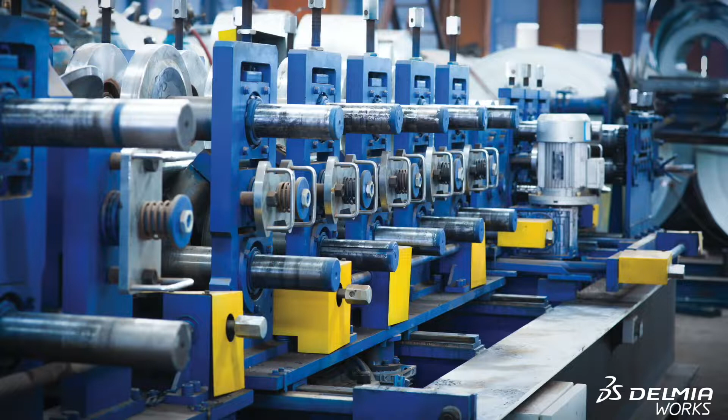Welcome to an overview discussion and demonstration of the manufacturing execution system from DELMIAworks. DELMIAworks understands your money is made on the shop floor, and the difference between an efficiently run facility and one that isn't can be drastic. Not only is it a function of time and money, but also overall customer satisfaction with on-time delivery of quality products.

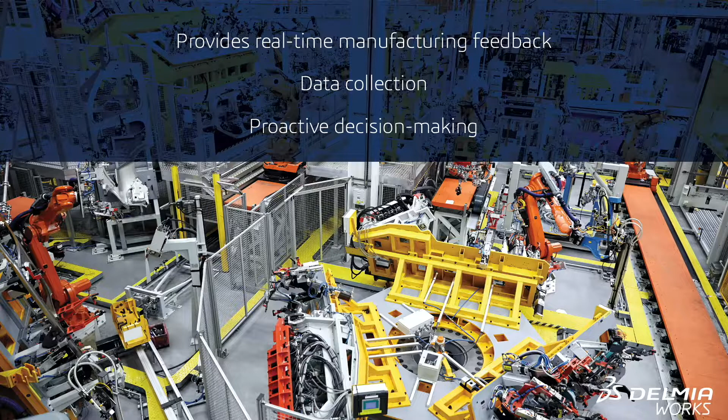DELMIAworks has developed a manufacturing execution system that provides real-time feedback of what is happening in the plant at each work center. These tools are designed to collect the data and feedback for users, which allows them to make proactive decisions that affect the organization.

Real-time machine monitoring from DELMIAworks is available in two versions: real-time production monitoring and real-time process monitoring. DELMIAworks provides a real-time production monitoring screen that allows users to drill into the details of the presented information. For example, from this screen, users can see things like what's running on the work center, parts to go and hours to go.

Standard cycle time information, last cycle, and average cycle. Users can also view quality issues that are outstanding for this item, hours to go or parts to go for in-process inspection, and other types of information.

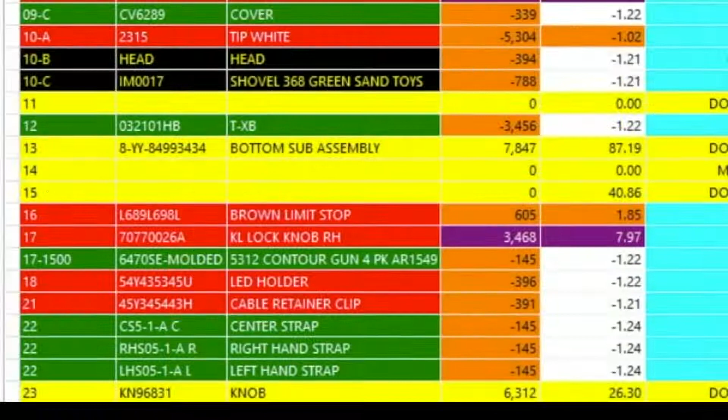Color coding is used here, indicating to users how well a machine is running for the given part that is being run. For example, machine number 1 is producing a volume cup. You'll notice that most of the line is colored in black.

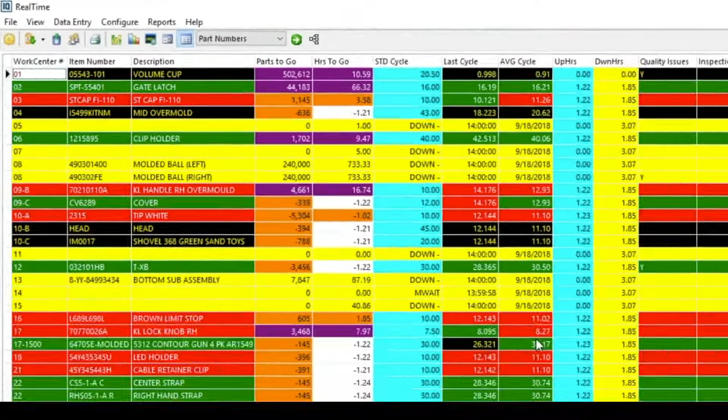This is because the difference between the standard and average cycle time from the last 50 cycles is significant enough to notify the user. This black bar indicates that the given machine is running quite a bit faster than what the standard specification may be.

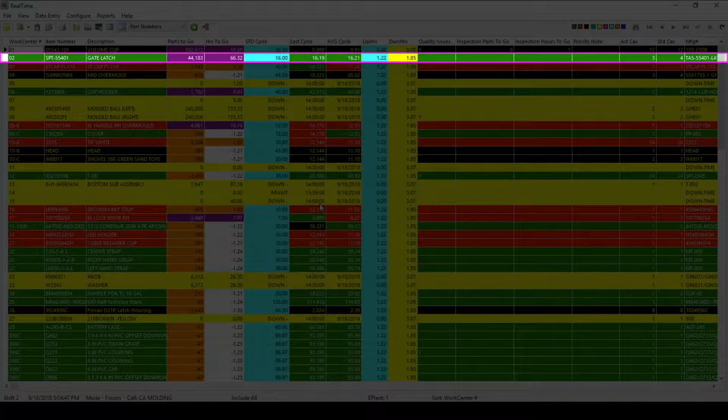The second work center is in green, which indicates that machine is running within a standard threshold. Here we see a standard cycle of 16 seconds with an average cycle of 16.21, which is well within range.

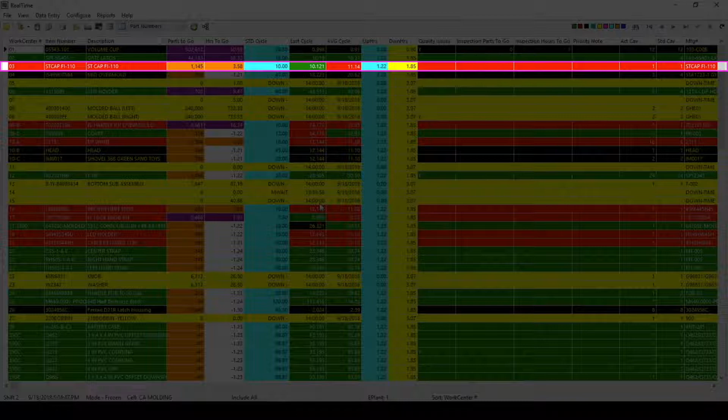The third work center is red, indicating that work center is running slower than what is expected, 10 seconds versus 11.14. User-defined parameters allow the system to use desired figures that the system will then use to determine how well work centers are running.

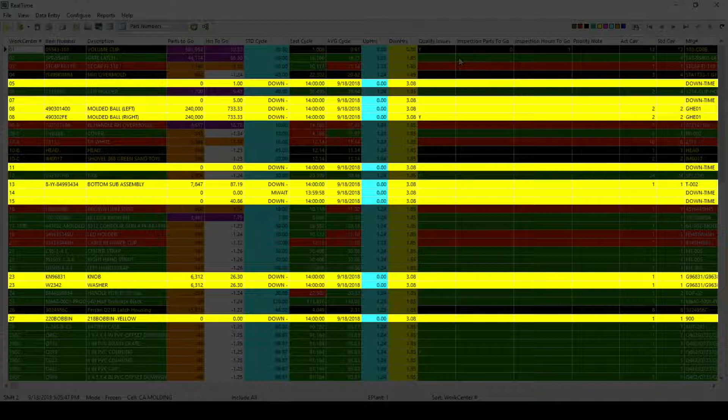Machines marked with yellow are those that are currently in a down condition, and when a machine is in a down condition, the operators or techs on the floor can diagnose the reason for the unexpected downtime for the given work center.

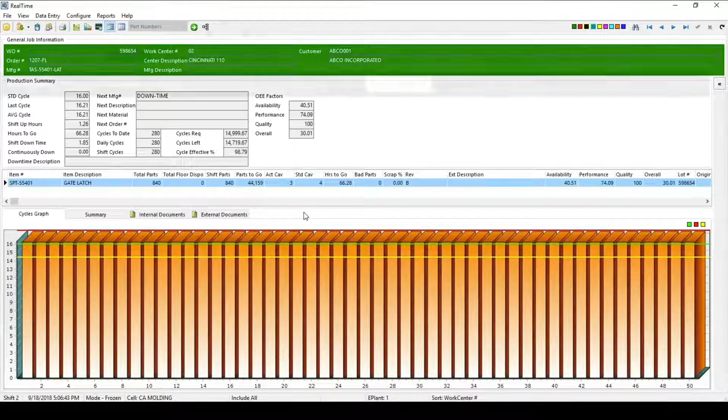DELMIAworks real-time process monitoring has the ability to communicate directly with the PLCs that are connected directly to equipment on the shop floor. The system then uses this generated data to compare against user-defined parameters and track jobs as they are running in real time.

For example, we are tracking machine number 1 and have 3 parameters that the PLC is feeding back to the DELMIAworks system: oil pressure, spindle speed, and tool temperature.

This is a very small sample set. In reality, these could include hundreds, if not thousands, of data elements that are being pulled from the PLC.

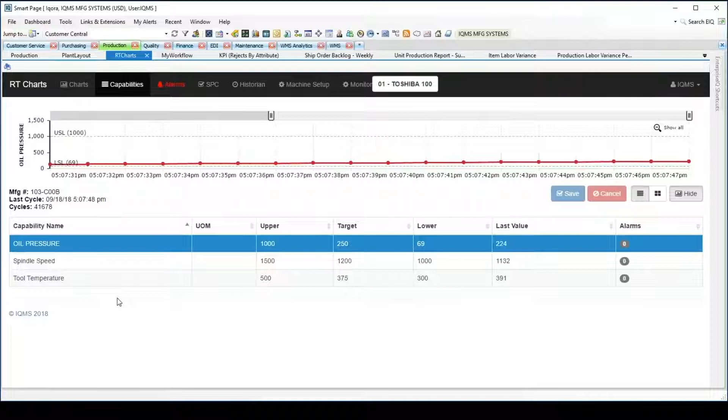In this case, for oil pressure, we've set a lower and an upper threshold with a target parameter. The same has been set for both the spindle speeds and also with the tool temperature.

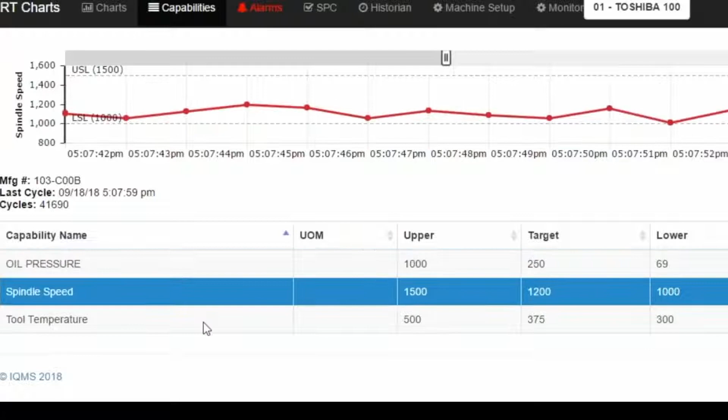We can then track the activity on the machine in real time, and the PLCs will generate live data points to view and analyze. Should the temperature of the tool fall below the lower threshold of 300 or go above the 500 mark, the system will trigger an alarm. This gives shop floor employees a chance to immediately address the issue at hand.

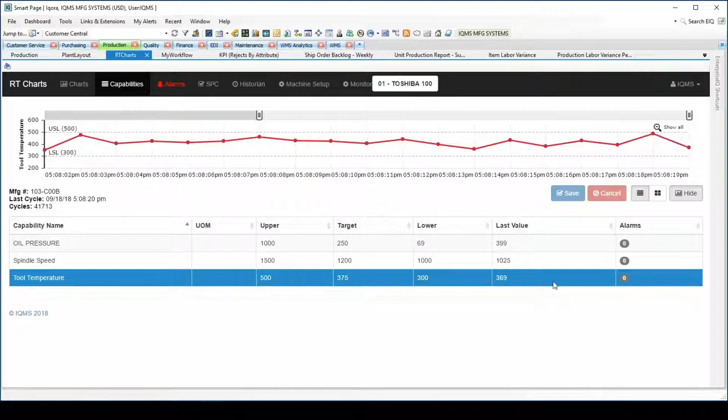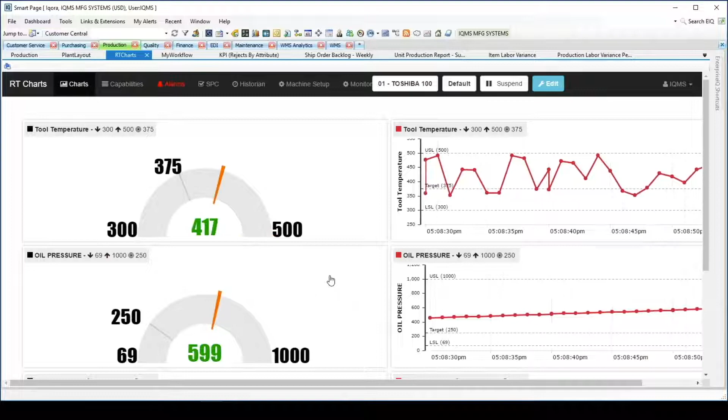The system then takes the real-time manufacturing data and presents it in a readable format in intuitive formats. All of the data is stored in a historian database, which then gives users the ability to look at archived production runs, a particular shift, a particular time during a shift, a particular manufacturing number, a particular item number, or even a particular lot number.

As a part of the MES solution, DELMIAworks has also provided the ability to interact with the operators out on the floor. This screen represents what an operator might see.

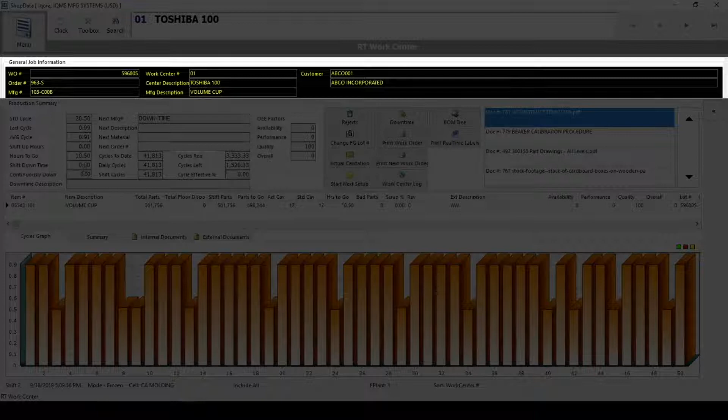Users can also report rejects directly online, and since this is a touchscreen, the system allows the operator to report rejects with the tap of their finger. This gives users the power to immediately quarantine the rejects while sending a message to quality indicating the parts must be put under extra scrutiny once they have been received.

The system also uses the reject information to add both parts that must be produced as well as the time needed to produce them due to the offset created by the bad parts. This ensures that the work center has completed producing the correct number of good parts by the time the run is complete, regardless of any rejects that may have been reported from the beginning.

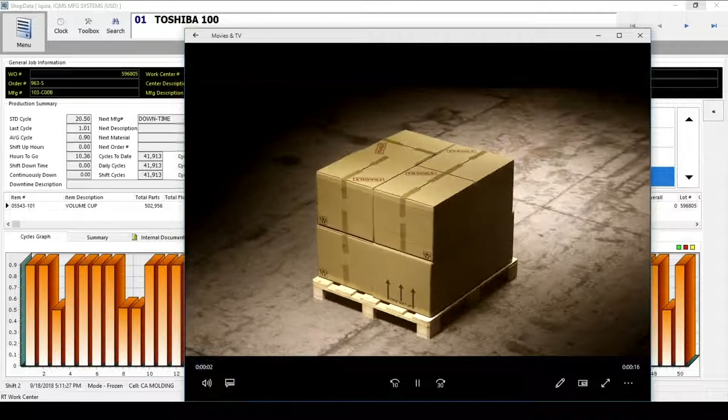The system also allows users to quickly reach vital documentation. They can pull up work instructions and part drawings, quality alerts, any information a user would need as an operator. Even things like videos can be attached, such as this one that shows how boxes should be stacked on a pallet. All these elements are components of the embedded document control system, which gives users control over the documents.

This also includes settings for determining who can access documents, who can change them, and then the electronic workflow that allows users to trigger a collaboration effort where a document is changed and checked in.

The system maintains all revisions of documents and allows users to revise those documents and push the released revisions out to every instance that might exist within the system. This eliminates the need to keep physical binders and replace old sheets when a document has been updated.

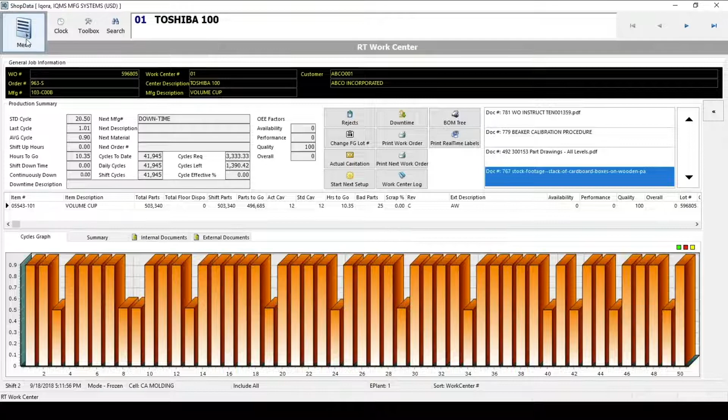Finally, the system can present to the operators or the quality techs on the shop floor directly the ability to perform inspections on the shop floor. If users have equipment that are part of the inline process, the system can pull the data directly from that equipment. Here you will notice that I've actually got some simple corrective action.

I've got 14 MRBs, or nonconformances, that must be reviewed, and I've actually got a PPAP for this item. We can easily view the details for these items and find where exactly each of these items are in their individual processes. Next, we can see the inspections that must be completed.

Because the inspections in this window are user-defined, the system shows users which inspections the organization has determined must be completed for the given part. In this example, we are doing an hourly in-process inspection.

When this is selected, the system presents the inspection set that must be completed, asking the user for the device information that's being used. This information is tied directly to our gauging device tracking system, which allows a user to track all the calibrations, gauge R&Rs, case studies, and those types of things.

If a user selects a gauge that is out of calibration, they will receive an error message saying the device should not be used for the inspection.

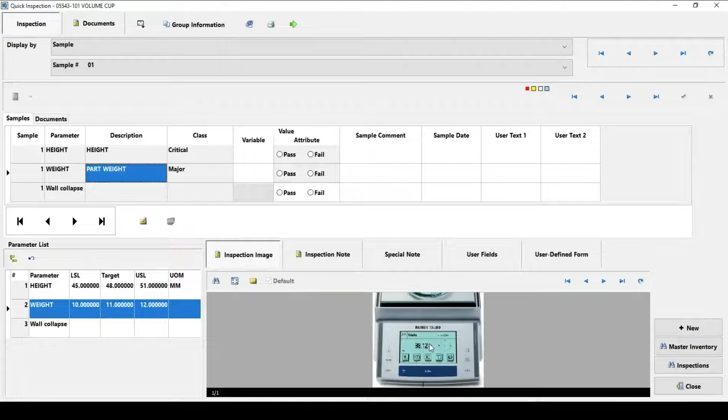For the inspection itself, users can record the actual results of the inspection. Again, users can reference attached photos or videos that can provide clarification on the ways in which the inspections are to be conducted. When digital measuring devices are used, they can transmit their results directly to the system using USB, serial, or other built-in ports.

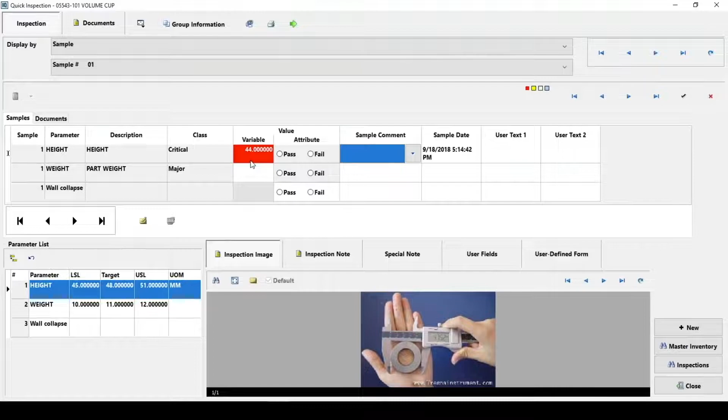The system will then provide immediate feedback if the measurements are out of spec with the part's bill of material. In our example, the height should be between 45 and 51. Since our measurement was 44, the system flags the measurement as out of spec, and it allows the user to leave a comment about this measurement as well.

The DELMIAworks MES solution provides all the tools necessary for our customers to get in front of situations before they run a lot of bad parts, to make sure that we're running as efficiently as possible out on the shop floor. It also generates invaluable manufacturing data that can be used on the top floor to make educated decisions affecting the operation as a whole. Thank you for taking the time to watch our demonstration of the DELMIAworks MES system.